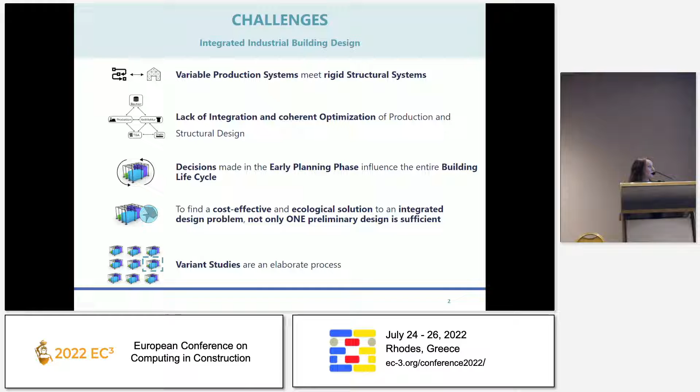And furthermore, there is the lack of integration and a coherent optimization of production and building systems or structural systems. Further on, if you make decisions in the early planning phase, they influence the entire building life cycle actually, but to find a cost-effective and ecological solution for an integrated design problem, you need more than just one design solution or design variant. But variant studies are an elaborate process, especially in integrated design.

So the research I'm presenting today is conducted within the research project BIM-Flexi, where we developed a digital platform for design and optimization of flexible buildings for Industry 4.0. And the research goal is to increase the flexibility, the cost efficiency, and the sustainability of industrial building structures when changing production systems occur. And we solved this issue with a generative optimization and decision support tool, the PMOOD framework, which I'm presenting today.

The PMOOD framework actually enables the integration of production layout planning into structural design. It enables automated generation of variants, the multi-objective optimization of production and building design, and finally it acts as a decision support tool, which gives real-time feedback for lifecycle costs, lifecycle analysis, and the flexibility performance of industrial building structures.

To give you a short overview, PMOOD means parametric multi-objective optimization and decision support framework. And in our previous research, we have already developed the PLGO model, which is a production layout generation and multi-objective optimization model, and the POD, the parametric optimization and decision support model, which conducts structural analysis and structural optimization, respecting the production layout and automatically calculating the life cycle costs, the life cycle analysis, and the flexibility of the structural system with regard to the production layout input.

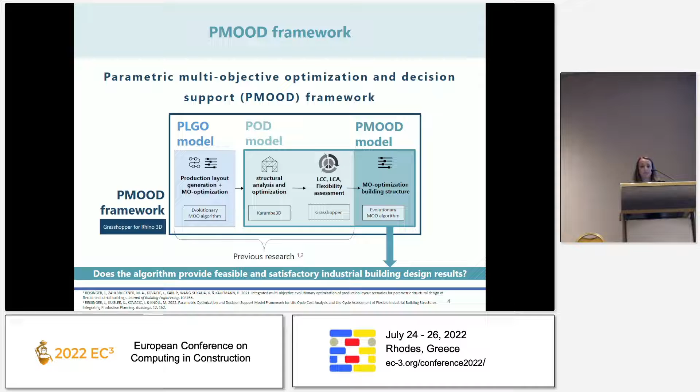So the POD model gets enhanced by the evolutionary MOO algorithm to the PMOOD model. And here you see a rough framework of the parametric model in Grasshopper, or the script. And at the end, we integrated the multi-objective evolutionary optimization algorithm, which is a Pareto-based optimization approach. Actually, we integrated 3 different evolutionary algorithms, the CTAEA, the SPEA2, and the SPEA2 plus SDE, to see which one performs best. But this is not the focus of this research today. And it's all written in one C# component in Grasshopper.

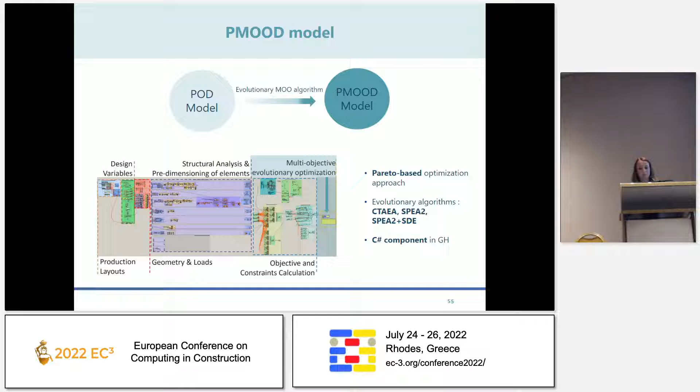So the workflow, how it works is, first you have the input. Maybe I do it like this.

First you have the input, and in the interface, you can input the building requirements, the property requirements, the production requirements, and then the PLGO model, the production layout model, automatically generates production cubes and the production process based on the input. It automatically conducts the performance evaluation. It evaluates the geometry, it evaluates the layout, and it calculates 3 flexibility objectives and 2 productivity objectives, which are then optimized with this evolutionary optimization approach.

And the PMOOD framework is semi-automated, because after the layouts are generated, we want the user to select the layouts which he wants to further investigate in his study. So he can select the generated layouts he wants to import into the PMOOD model, and this is automated.

So the PMOOD model, what it does is automatically generates the structural model, the cost model, and the sustainability model. It automatically evaluates the performance of the structure, and the costs and the resource evaluation, and the objectives for multi-objective optimization are 5 flexibility ratings, the life cycle costs, and the life cycle assessment indicators.

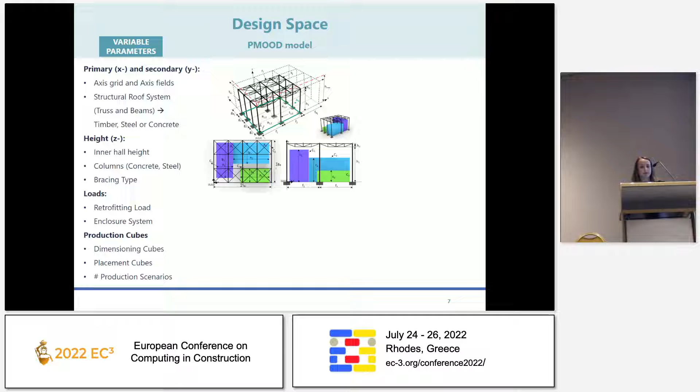And the production model varies the dimensioning of the cubes, the placement of the cubes. We are talking about the production areas, and the number of production scenarios. The objectives are already mentioned: life cycle costs, life cycle analysis, and flexibility performance.

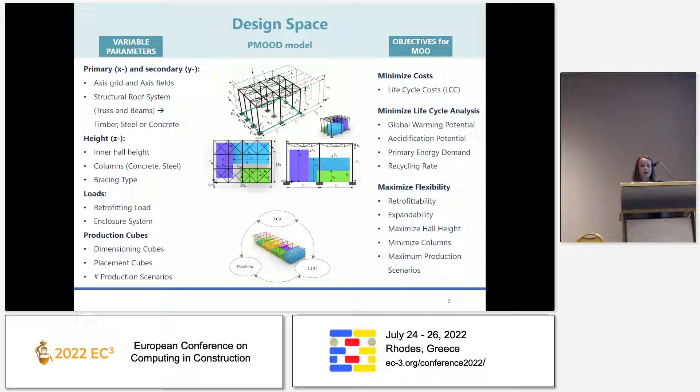The flexibility performance, we published it in another paper, so we created our new flexibility criteria, where we are evaluating the retrofitability of the structure, the expandability of the structure for future expansion of the production system. We aim to maximize the free inner hall height, minimize the columns inside the production areas, and maximize the production scenarios. This is a quick demonstration of the parametric framework.

Does it work? Yeah. So here's the PLGO model, and it already generated automatically the possible production layout scenarios. The more you go right, the less good they are rated. Then they are integrated into the model, and here we said, okay, we want to examine 4 different layouts within the building generator, and this is just where we show which layouts are now integrated.

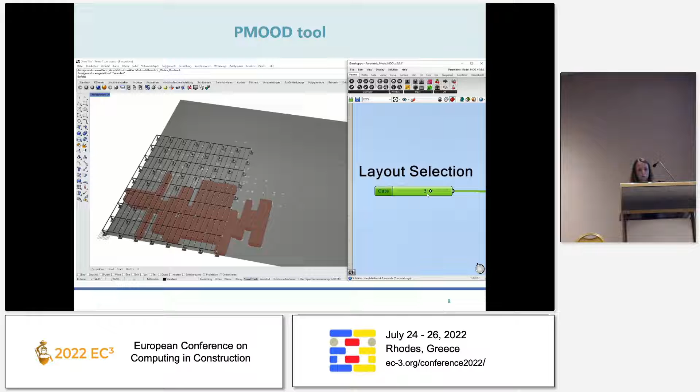And then, these are not the best and optimized layouts, we have to say. This is already a little older video. And this is the C# component we developed. So you push start, and then... yeah. Sorry for that.

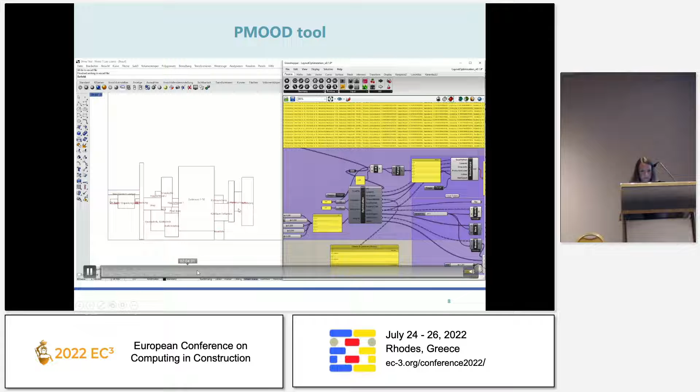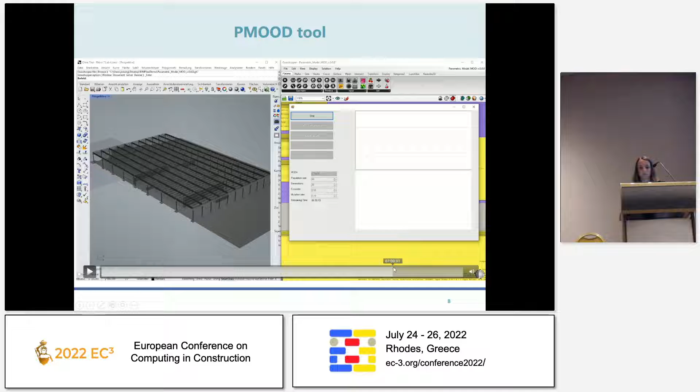So you push start, and then the algorithm generates, depending on the design space or on the generation crossover mutation rate, around 13,000 variants, and collects the results. Here we also said, okay, we constrain the length of the hall, we just want to differentiate the width of the hall. And finally, you get all the results and all the examined building variants stored in the mask on the right, and it's already ranked.

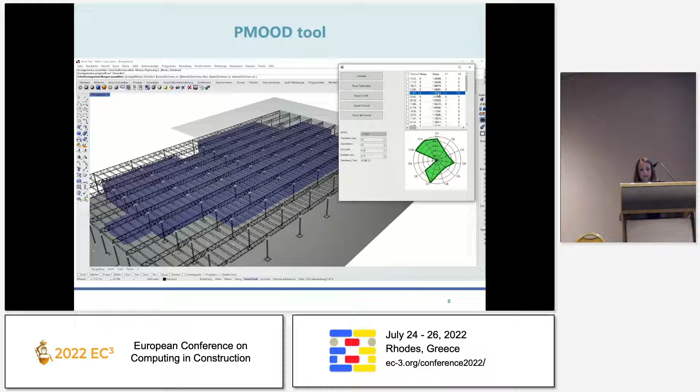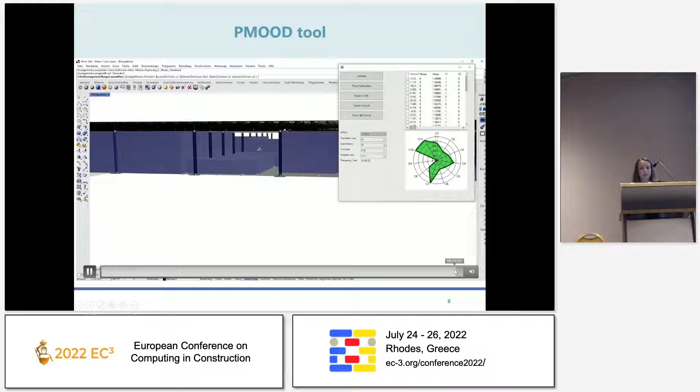So on the top you see the best performing variant, and now we picked the 5th variant, and you always see real-time feedback on what it costs, what is the LCA performance, what is the flexibility performance, and so you can click through and do some interdisciplinary user study. Finally, you can also select the final solution and export it to a database, export it to BIM.

So this is the developed multi-objective optimization window. You see the visualization in Rhino 3D of the selected generated building variant. They are all ranked. And on the right, you see there is a weighting.

So if there is a user, a building owner, who says, okay, I'm only interested in the cheapest version, so I put lifecycle costs to 100% and all the other criteria to 0, then the algorithm or the mask sorts it anew and shows you just the cheapest one and doesn't try to find a trade-off between the goals. And then you have the real-time performance feedback.

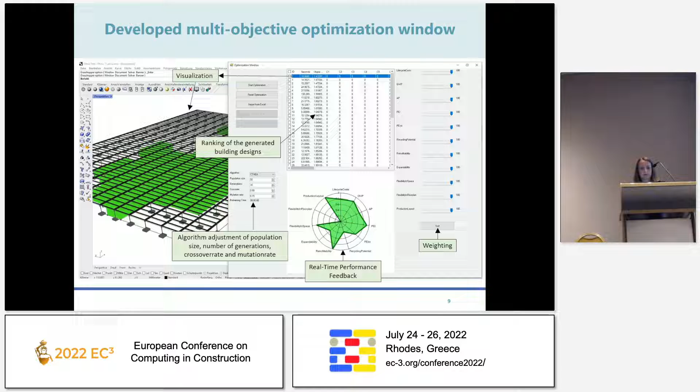You can see what it costs, what is the CO2 emissions. Exactly. So we conducted a user study testing if the PMOOD framework generates feasible design results. So we had 36 master students from architecture and civil engineering, which got together in groups of 2, we had then 18 groups, and they were simulating an interdisciplinary design process, and their task was to find the best solution for a hygiene production facility.

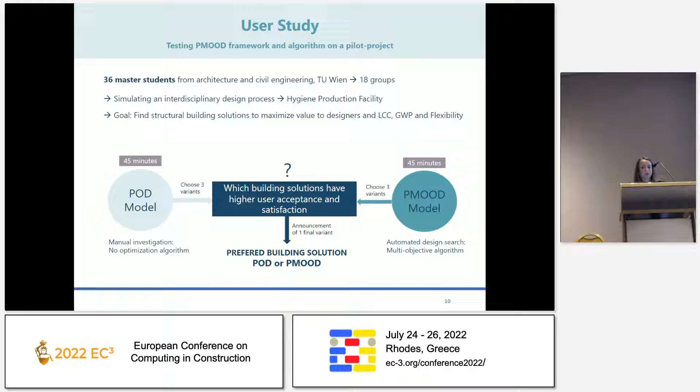So they had 45 minutes for the POD model, where they just manually changed the parameters and did some manual investigation of design options with no optimization algorithm. And they had the PMOOD model, where they got provided with the best performing solutions generated by the algorithm. Then they had to find 3 different variants, and which building solution has higher user acceptance and satisfaction was our question. So they chose one final variant and announced to us if they preferred the building solution from the POD model or from the multi-objective optimization model.

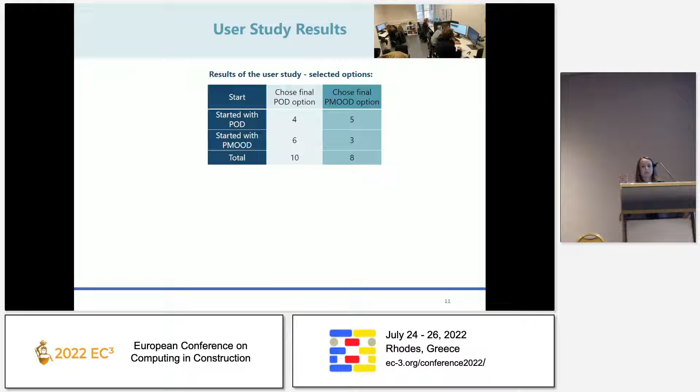What were the results? The results were that 9 groups started with the POD model and 9 groups started with the PMOOD model, and then they switched to avoid the learning effect. So when the users started with the POD model, in 5 cases, they chose the PMOOD option. When they started with the PMOOD option first, when they clicked through the generated design variants, they mostly chose the option they designed afterwards in the manual creation process, which means probably they saw already really good results for them, and then in the POD, in the manual generation, they just adjusted them a bit. So 10 chose the final POD, and just 8 chose the PMOOD.

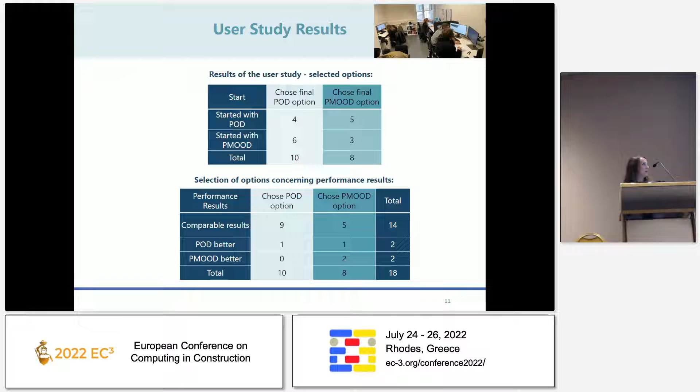And when we examined the performance results, which one they chose, when the performance results were comparable, they rather chose their own generated option instead of the one from the algorithm. And in one case, the performance results of the POD model were better, but they chose the PMOOD option as their final result, indicating that the algorithm found a solution they wouldn't have thought about.

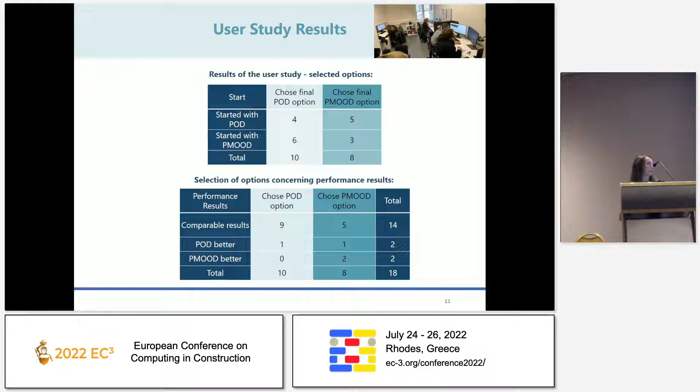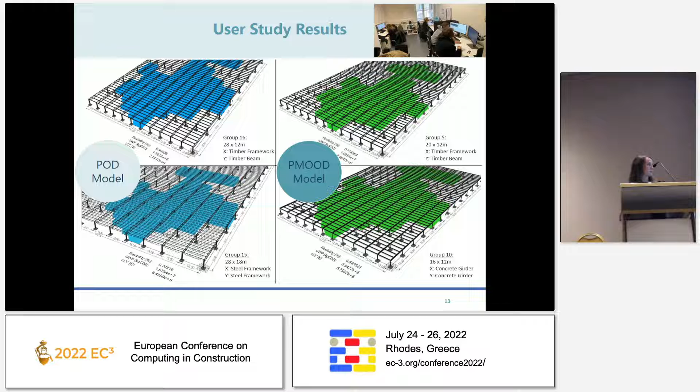Here you also see when they worked with their design intent and found their own variants, on the left side you see they chose rather big axis grids, but the algorithm provides smaller axis grids. So yeah, in manual creation, they rather choose higher costs, but want to have more flexibility.

Good, conclusion. The major difference between the investigated designs with the POD and the PMOOD model were in axis grid, materiality and roof structure type, so there were major differences. But we did not find a significant difference that the PMOOD model is preferred over the POD model. The PMOOD model replaces manual creation and reduces the time for design generation and exploration, but according to our study, would not provide better solutions for the user. And material combinations are a critical factor, which we've seen and which is not yet considered in the algorithm.

The future outlook is we also coupled this model to a multi-user virtual reality model. There the users can do the variant study and investigate the generated building options from the algorithm in virtual reality. This is already published, but in the next step we will investigate if the user experience and the user satisfaction is higher with a virtual reality framework than in Grasshopper.